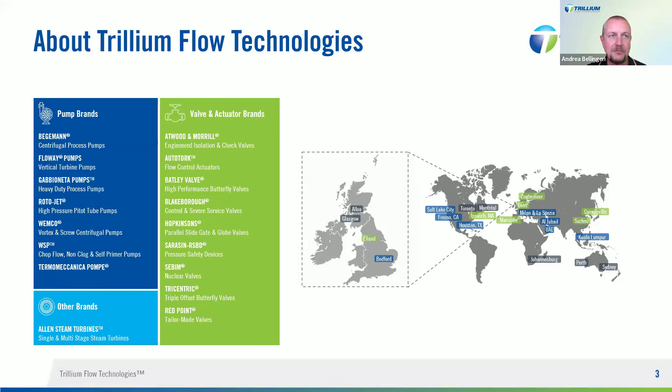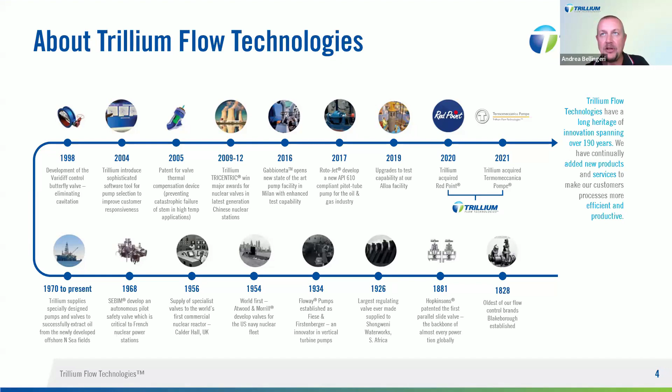Some interesting milestones in our history. We have a long heritage of innovation spanning 190 years. We started in 1828. We're continually adding new products and services to our portfolio. The last two additions were in 2020, Red Point, and in 2021, Termomeccanica Pompe from Italy.

A good idea for today is also the virtual trade show. If you are interested in having a look at our products, we welcome you to register at virtual.trilliumflow.com and enjoy the show. You can learn about our service offering and see what industries we are able to serve.

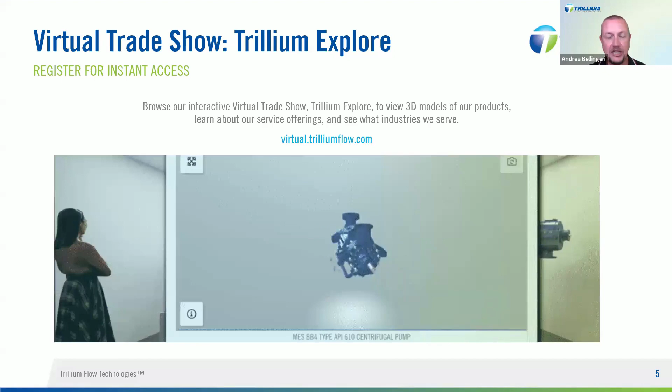Today we're going to talk about four important points, which we call market trends. You will hear about process efficiency and cost reduction in the supply chain. The point is how Trillium will be enabled to share cost savings with the client.

We also have reducing environmental impact and energy efficiency. By connecting our assets to the plant's control and data acquisition system, our clients can manage their entire process and gain efficiencies. Information from Trillium will support improvement in environmental governance while reducing the associated compliance cost.

That's our message. Regarding remote control and automation, this is called the Trillium Customer Digital Experience Innovation Area. Trillium can provide 24-hour-a-day monitoring and monthly reporting to increase on-site service capabilities. Decision-making driven by big data.

Trillium's cloud-based enterprise will enable our clients to have data readily available. Before Internet of Things, wireless monitoring, and 4.0 industrialization, which will be explained better by Sanket shortly, generally a product was used to be operated until failure. If the asset fails, both plant maintenance engineers and technical staff would be deployed into action to identify and solve the issue.

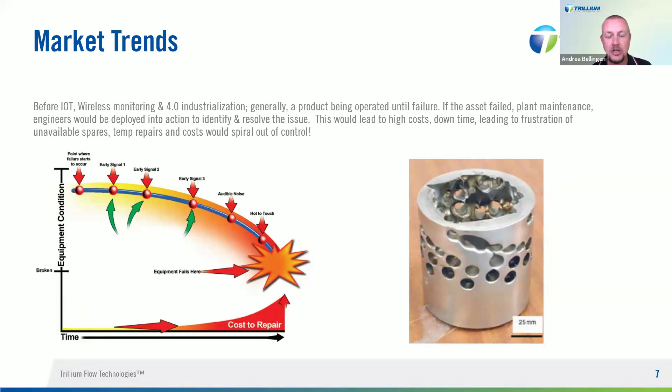This, of course, would lead to high cost, long downtime, and missing production. This is a huge impact, and we try to avoid this. We want to propose a solution to predict this and prevent it from happening in advance.

Customer pain points - what do we want to address here? What are the major pain points? One of them is certainly underperforming valves due to erosion. What causes this erosion? We are dealing with fluids, mainly hydrocarbons, with traces of sand.

Throttling these fluids, the local velocity increases, and this can lead quickly to rapid erosion of the valve trim. It's just a matter of time - it will happen. Most conventional control and choke valves are designed with labyrinth-style trims to achieve multi-stage pressure letdown, and this will also cause sand blockages. Now I'd like to pass the ball to Sanket, who will drive us to the core of our speech.

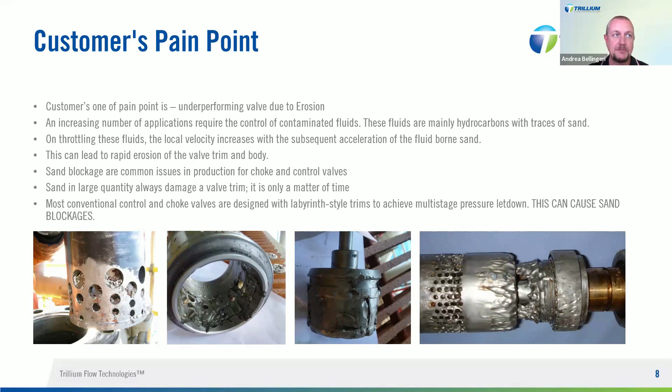So we have just seen how the valve has been used before IoT, or call it IIoT, and the result of it is expensive catastrophic damage.

But what is IIoT? What exactly is it, and how could it be beneficial to its end user? Basically, it's an abbreviation of Industrial Internet of Things, a vital element of Industrial Revolution 4.0, which is the current era of connectivity, advanced analytics, and automation.

The industrial machines have been producing valuable data for many years, which can be collected in a real-time environment and then processed through analytic software to track efficiencies, life cycle, and potential chances of failure of each machine. This technology can be used in process industry, as it can offer efficient maintenance processes, eliminate manual intervention, provide better safety to personnel working around the asset, and mainly it can help reduce production cost, which is what we are targeting.

We are addressing this in our solution. With this technology, sensors fitted around the control valve can continuously monitor its physical properties, and the monitored data can be compared with a pre-established baseline. If the valve starts operating below the pre-set threshold value, the system sends an alert to plant supervisors and engineers. Thus, a malfunctioning valve can be addressed well in advance, preventing costly delays and production losses.

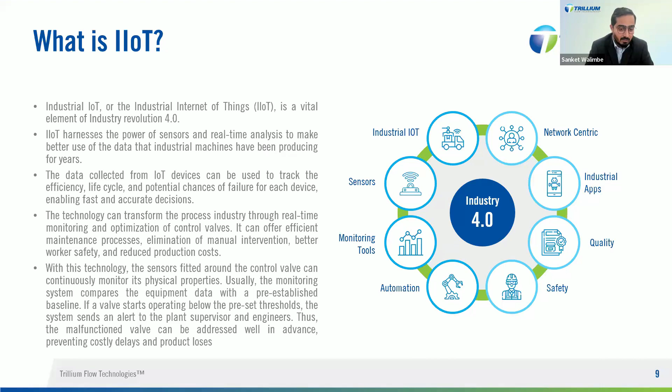So this is basically an overview of how we are looking at using this technology in our products - how we utilize IoT to address customer needs using our product expertise. Our fundamental commitment is to develop a sustainable solution. It took us years of strategy, planning, and thousands of hours to develop a solution that could address dynamic and unique customer needs.

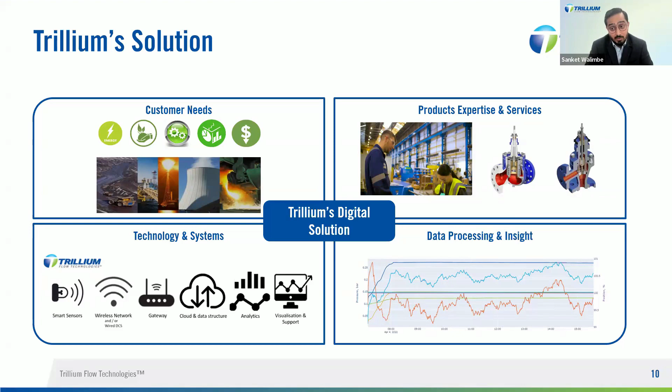Harnessing the power of cloud architecture along with data analytics tools, our system utilizes innovative smart technology to monitor performance degradation of mission critical valves. As you see in this slide, we equally considered every corner: the technology, the data analytics, our product expertise, and last but not least, the customer need.

I'm going to talk you through what exactly the solution is - just give you a bit of an overview. Trillium's new technology digitally transforms existing systems to give total care. It provides real-time condition monitoring, enabling plant preventive maintenance, minimizing downtime, and improving productivity of the plant, thereby increasing machine uptime and operational efficiency.

These are the clear benefits to customers using our technology. We aim to use big data - all these machines, equipment, valves, and things generate a lot of operational data. Our digital platform can handle large data sets 24/7 to better understand operation of a particular asset.

The customer will have full access to their asset operational data. Of course, they own the data, and they can deploy advanced analytics through our software to obtain accurate information about the condition of the assets.

We have also given a touch of predictive analysis in our solution. The data generated from the digital platform can be used to predict machine condition and anticipate any failure, so that operational efficiency can be maintained. If we can anticipate the failure of any particular valve, you can deploy forces accordingly.

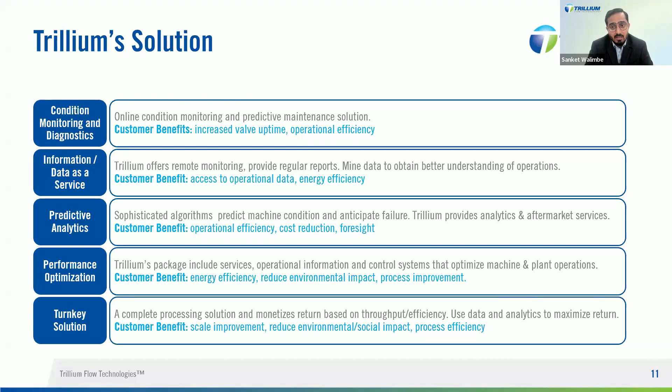So we have seen the overview of the solution. Let's take a look at how it's going to benefit the customer. I've taken an example of a 4-inch duplex control valve in a severe service application.

As you can see, I've taken an example of an oil and gas production system. But the severe service application can be found in any power station, refinery, or industrial plant where large mass flow rates at high differential pressures are needed.

In this example, the valve handles production and injection fluid, which are highly corrosive and erosive in nature. On the left side of the slide you can see the fluids listed. It could be a mixture of these, or a standalone fluid, but eventually it will erode away the valve in a matter of weeks or months, depending on service conditions.

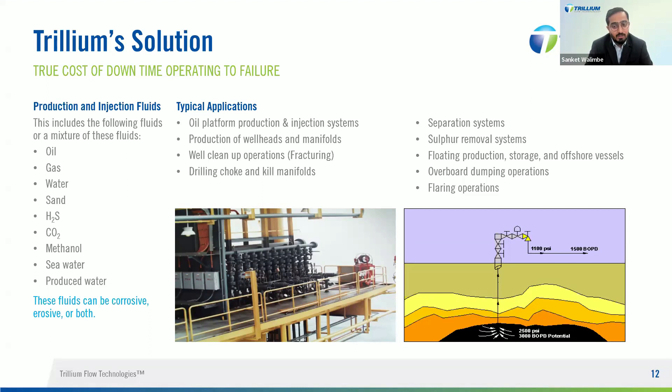We assume the valve is operated to failure, meaning without Trillium's condition monitoring system installed on it. Upon failure of the valve, you have to deploy emergency inspections, which would cost nearly $300.

I wanted to highlight this is the absolute minimum. If the valve is located offshore on an FPSO in the middle of the North Sea, this cost would definitely be in the thousands. It all depends on where the valve is located.

Then there would be an emergency labor cost, which is again $600. This will go into the thousands depending on where the valve is located.

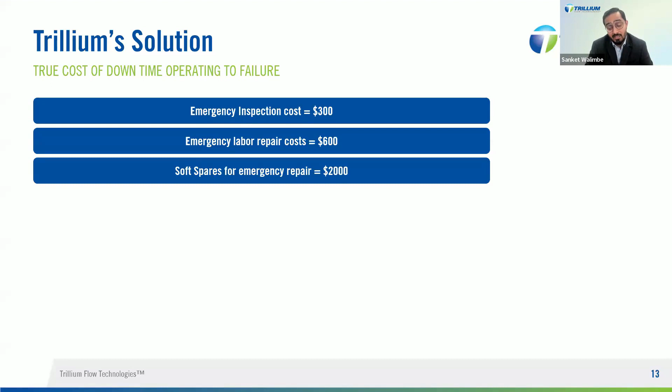Then you will need a soft spare in emergency spares, costing nearly $2,000. Along with that, you will need a new trim set - the plug, stem assembly, cage, disc stack, seats - costing around $6,000 with a 12-week lead time.

This is the critical point, because the supply chain could be long. If any of these components are made of exotic material, it's going to take a really long time to get that part back onto the valve, and it's going to cost a lot as well.

This is the minimum cost I'm showing you here. The additional soft spares you would need for future maintenance would cost nearly $2,000. And you would need to expedite everything to get it quicker, because you can't wait 12 to 14 weeks.

It would cost you $3,000 to expedite, again depending on how the supply chain is set up for that particular component.

Finally, when you have all these components, you need to fit them back into the valve. That again costs $600, depending on where the valve is located.

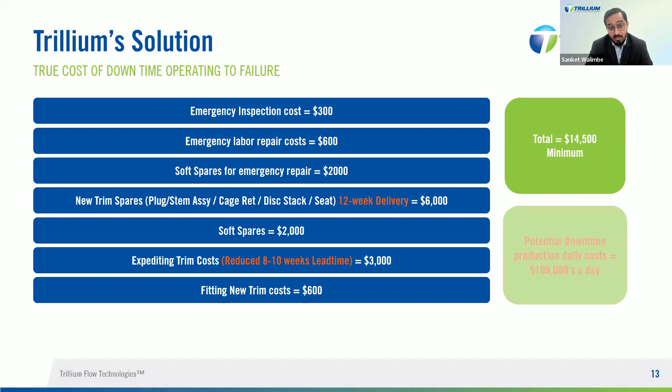So everything put together - the emergency cost, the inspection cost, the labor cost - would be nearly $14,500. This looks like a very small amount when you think about an oil and gas production system. But the major cost attached to it is the production downtime cost, which could be hundreds of thousands of dollars per day.

If this valve had been equipped with the Trillium Smart Valve technology, we reckon the potential saving on the emergency cost would be 45%. And the downtime cost could go down between $50K to $100,000 a day. So this is the cost we're targeting - how we could minimize this downtime cost using our technology.

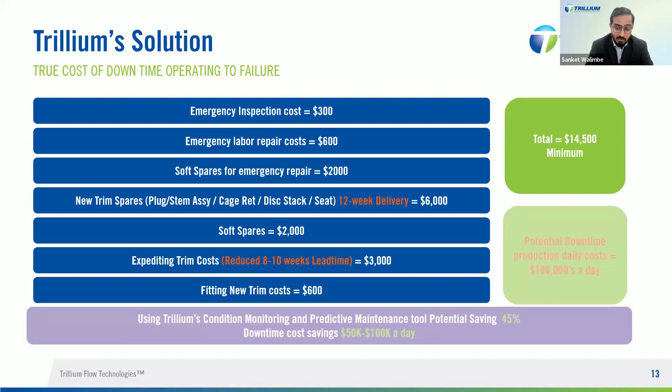So we talked about the market trends, we talked about customers' pain points, we had an overview of our solution. We also touched on the example of the potential savings this solution can bring to the customer if this system is in place.

Now let's take a brief look at the architecture of the dashboard - basically the software - and look at where you can see all the critical information on one screen.

When the system is up and running on any asset, the first thing you have to do is select the asset and where it is. You have drop-down boxes where you can select the site, select the asset tag number, and click the submit button, and it will populate the necessary data.

You also have the option to use the interactive map - you can zoom in and zoom out to select the asset if you know its exact location. There's also a table that gives you an overview of the assets and tag numbers, so you have an option to select that way as well.

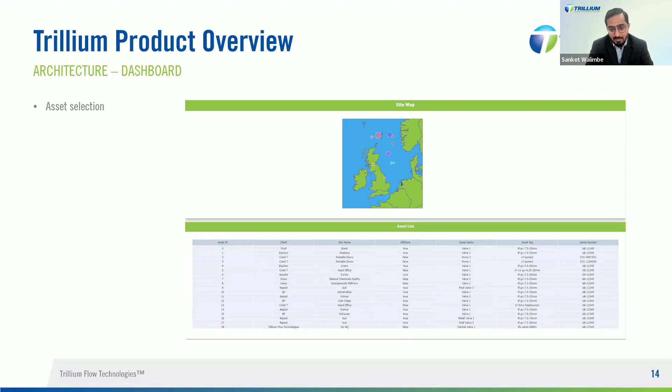When you submit this information about the asset, the dashboard appears, displaying the flow parameters - as you can see here, the upstream and downstream pressures, and the valve position from the digital positioner.

You will have a flow meter reading, which is basically the flow rate going through the valve. You have a fluid temperature, and the fluid type, which depends on SG, the specific gravity of the fluid. You also have the health of a battery and a signal strength of the connected equipment, which is quite an important parameter to keep an eye on.

So all these readings are taken live, and the refresh rate can be selected according to the criticality of the asset. You basically set the refresh rate you need, whether in a few seconds or in 5 minutes, which affects the battery consumption needed for each instrument. So you can select that refresh rate according to the need of the process.

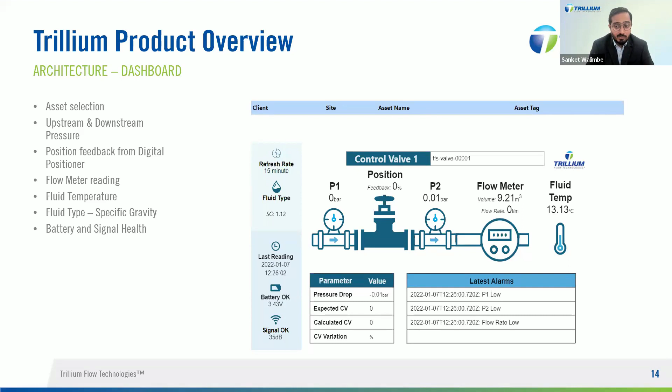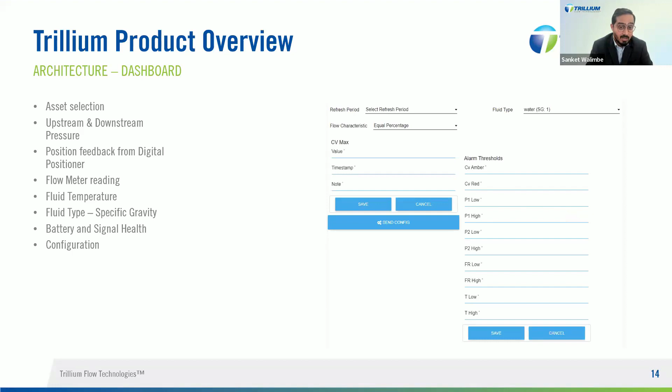So we have seen the dashboard now, the different features, the different buttons, and how you can select the assets and everything. Now let's take a look at data storage, connectivity, and asset access.

The first and probably the most important instrument is a digital positioner or smart positioner. Our platform is flexible to accommodate input from industry-leading positioners. Our system can take inputs from various interfaces such as HART, smart positioner, field bus, etc. Any interface you have on site, our system can be tweaked to take those inputs. So the system is flexible, and the customer doesn't need to consider changing their existing positioner or any other instrument.

When it comes to installing additional sensors, data loggers, transmitters, or gateway systems, we partner with industry-leading suppliers to get instruments suitable for hazardous zones, pressures, or temperatures. You have different temperature limits for particular fluids, so we can bring those suitable instruments into the package and have that supplied. So there's flexibility there as well.

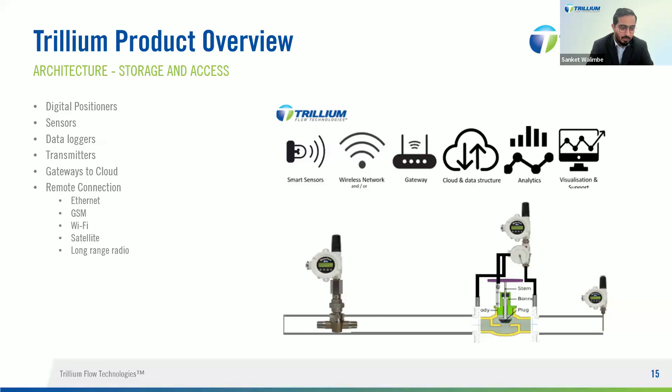The important thing is remote connectivity. During our development stage, we focused on this attribute, so we developed the system to be connected using a variety of networks such as Ethernet, GSM, Wi-Fi, long-range radio, or even satellite. So if the asset is in a confined space or somewhere remote where network selection is limited, we can work with the available network and get the instruments connected and get the data into the software and analyzed. That flexibility is there as well.

The most critical part, or probably the next critical part, is data storage. We understand the data is very, very precious. It's very classified with some customers, and it cannot be shared with third parties.

So we have given an option to save this data. The customer can deploy a cloud-based server, or have Trillium servers, either on cloud or on premises, or the customer can use their own server. Flexibility is definitely given there, as we understand data is very critical. In any of these cases, we ensure that the data and the network is secured and protected at all times, because that is something everyone is looking for in this digital scenario—how the data is protected and secured.

Then the alerts are probably the key, without which the system is incomplete. If you don't get the alert about your thresholds, then you're basically not getting the information about your asset. So once the data is analyzed by our algorithm, the customer can get alerts via emails, on the dashboard, or text messages on the designated device, so that the necessary action can be taken in a timely manner.

As I shown you previously, you can select your thresholds, and then you will get the alarm when the process crosses the threshold, and you can get the alarms on your selected device.

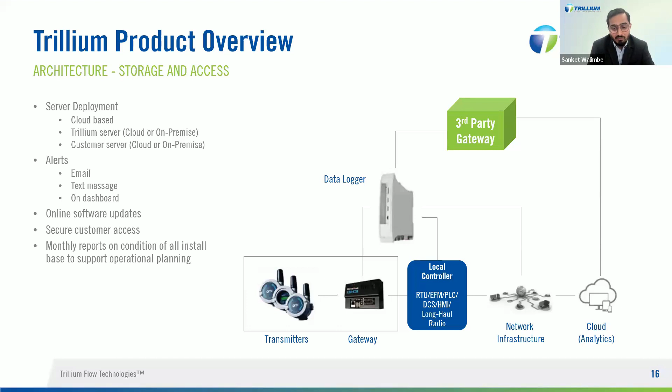So we have seen the dashboard, the storage, connectivity, mostly related to the cloud and the software. Now let me take a step back and give you an overview of the approach we took to develop this condition monitoring algorithm.

Andrea has talked about one of the issues in a severe service valve, which is erosion. We understand this issue is inevitable—it can be minimized, it can be detected early, but it cannot be avoided entirely. So we addressed this issue and came up with an approach to develop the algorithm around it. Let's take a quick look at the approach.

We started with extensive lab testing. To identify the wear rate of different materials, we supply this trim in different materials, and all these materials have a different rate of erosion. They erode away—some materials are softer and erode quickly, some are harder and take longer. It also depends on the service condition, not just the material. So we needed to understand how exactly this material erodes in different conditions.

We developed a small erosion test bench to understand how these different materials react to different erosion conditions. As you probably know, the erosion rate is a function of concentration of contaminants, size of contaminants, specific gravity of the fluid, and velocity of the fluid. We came up with a number of permutations and combinations of these factors to develop the erosion rate.

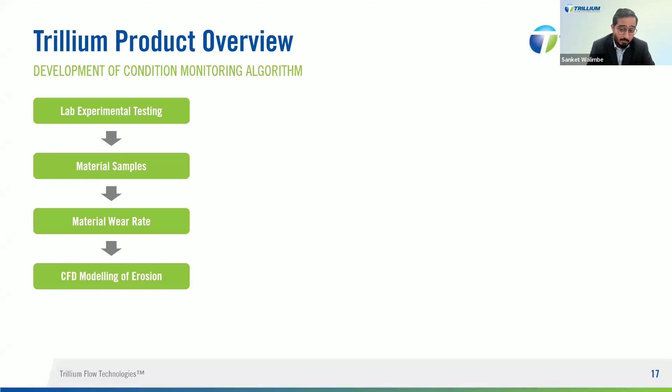Once we know the erosion rate of that particular material, we deploy that erosion rate using computational fluid dynamics to the individual trim. This helps us come up with a baseline for the algorithm. This is kind of a theoretical exercise that we did.

To verify the outcome of this CFD or theoretical data, we developed a full flow loop for conducting erosion tests on an actual valve. We created an erosion media with different sizes and concentrations of contaminants, ran it through the loop at different velocities, which generated the erosion trend of that particular trim. We then compared the final results with the CFD to understand how close the empirical test results are to the CFD.

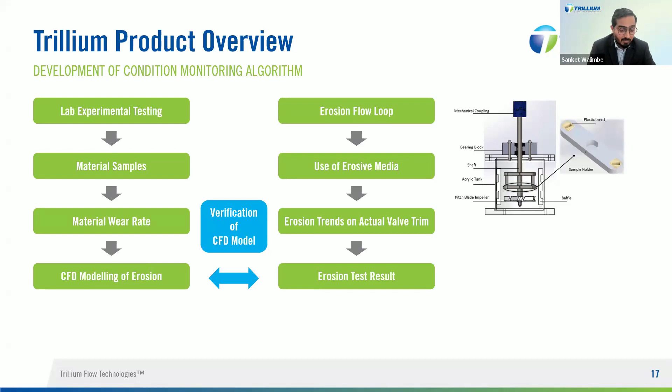It's a small flow loop, so we didn't bother about going for wireless, but we can definitely offer wireless sensors here. And this is basically the flow loop. So we basically conducted multiple flow tests on the trim, evaluated the erosion trends from each of the trim, and as I said, I compared with the CFD results, and we further refined our algorithm.

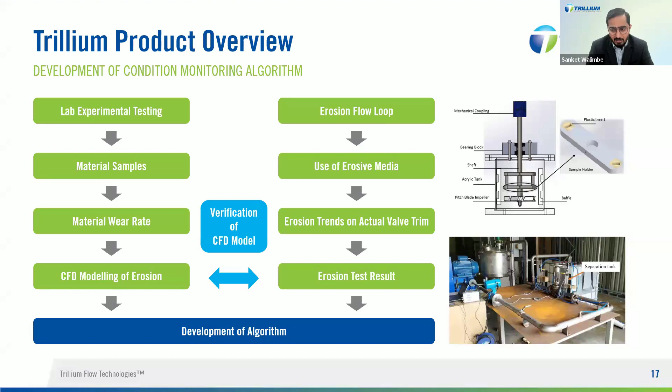That basically can be used going forward in any of the field like scenarios. So let's see a little further on the CFD studies. We did understand the effect of erosion at a micro level.

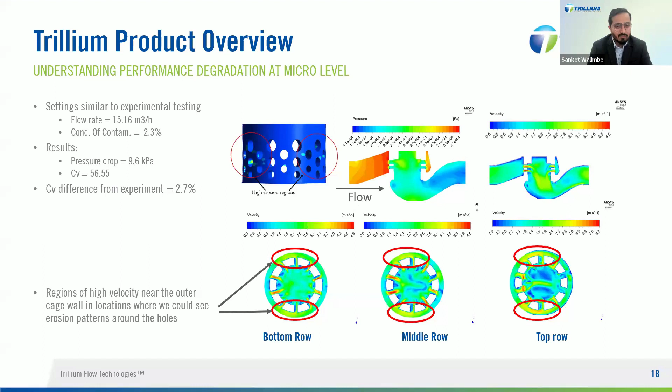So let's take a look at how we use this understanding from this micro level study to understand the bigger problem. We came up with a global erosion rate. We basically understand the erosion rate at local areas, and from the local areas we basically come up with a global erosion rate. And what we did is we extrapolated that result to understand the valve, to understand the effect of change of the CV on the valve position, according to the valve position, and on the specific time frame as well.

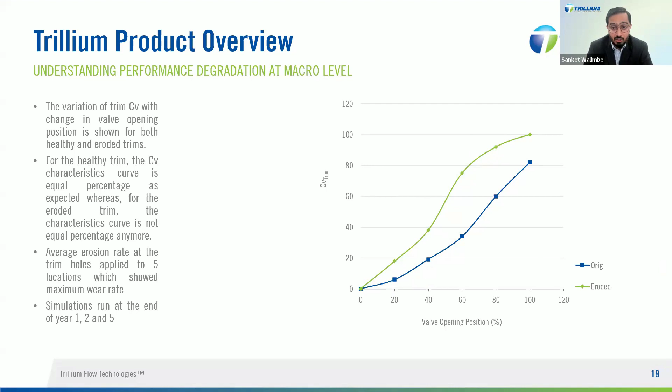So if you see on this graph, you have two CV graphs. You have equal percentage, which is the original graph of the trim, and you have one which is the eroded trim. That's basically something coming out of when you apply the global erosion rate to the particular trim - it shows the change in the CV according to the position. And then there is the average global erosion rate we apply to the trim to identify a CV change over the number of years.

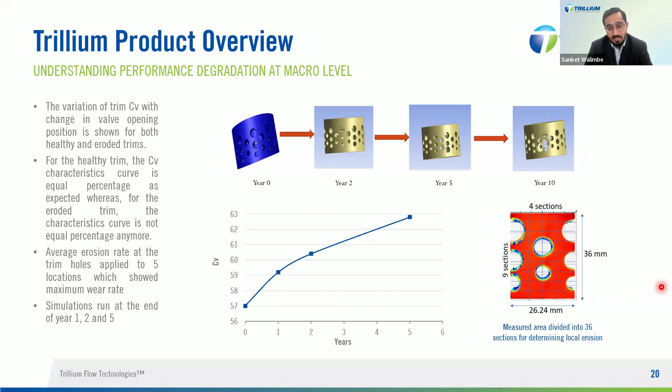So as you see, there is a number of years considered, like in this example, 5 to 6, 7 years, 10 years timeline, but there is no trim that can last around this long time. This is just an example I wanted to show for this presentation. But as you can see here on this image, the area of the flow path has changed over time, and that basically reflects on the CV. So that's basically the performance degradation at the macro level.

Then we conducted empirical tests to validate this theory. We conducted multiple accelerated erosion tests. We started with a soft material trim, which we redesigned to suit the process condition of the loop. So we considered a bronze - we just wanted to prove the theory, so we considered the soft trim here.

The design CV of the trim was nearly 12.67, and the predicted change after the test was 18.97. This is coming from the theory, and then we set similar conditions on the flow loop and found the actual change in CV was 18.15, which is pretty close to what we predicted, within plus and minus 5% of the theoretical results, so that's what we expected.

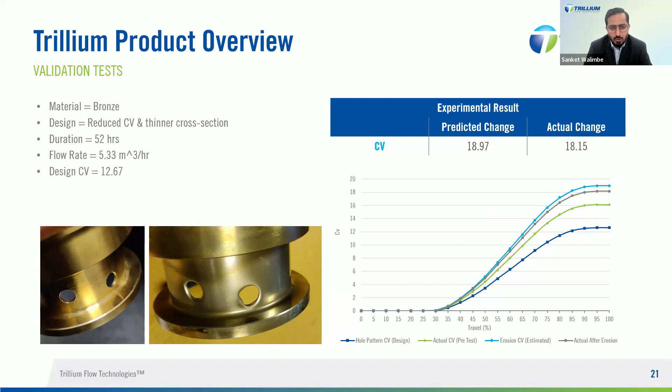It's pretty accurate. If you notice on this graph, the solid light blue line shows the theoretical CV, and the gray line shows the actual CV found after the test. So it's pretty close.

That's all the information, all the results we've seen during our development stage and testing. But how exactly the customer will see these results, how they're represented to the customer, is the critical part of it.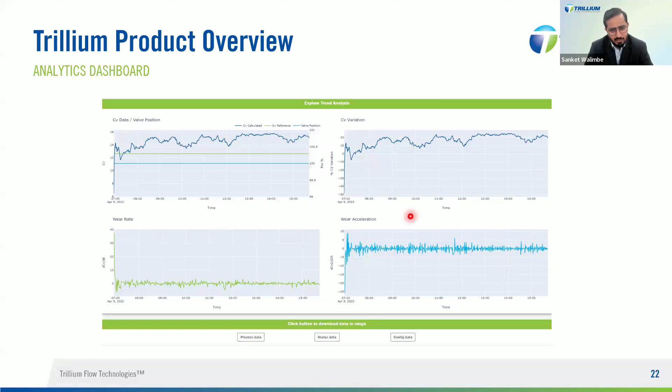Again, I can emphasize on this plateau - in this example, you can see there is less acceleration compared to the rest of the test. Lastly, you have an alarm window which provides information about the different thresholds you have set.

You have a P1, P2 alarm, your CV alarms, you have flow rate, and you can select the temperature as well if you want. All of this can be set, and all of this can be notified on the dashboard.

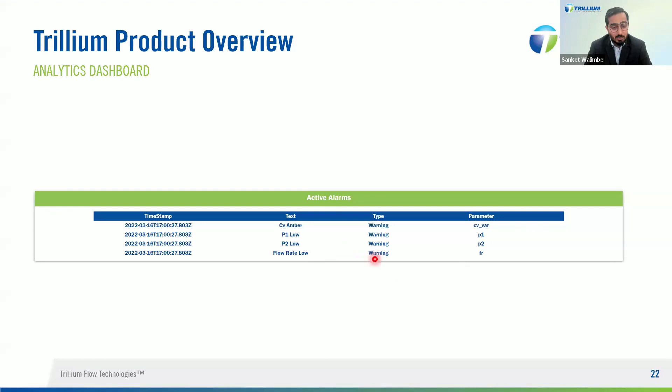You can see all this information on one screen, or you can set it on multiple screens. It's basically as long as you can have your decision informed in the right and timely manner - we can set up all these things according to the need.

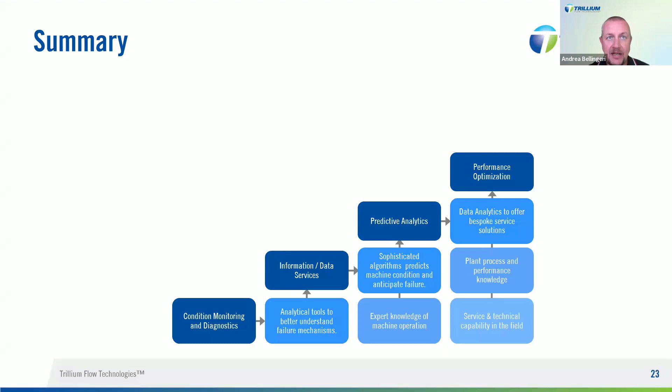Condition monitoring and diagnostics will provide information and data service, which will lead to predictive analytics due to our algorithms and anticipate failures. This is a performance optimization of valve, line, system, and plant, due to mitigation of risk and money savings. So we're proud to say this is our turnkey solution and leverage capabilities to move up the value chain.

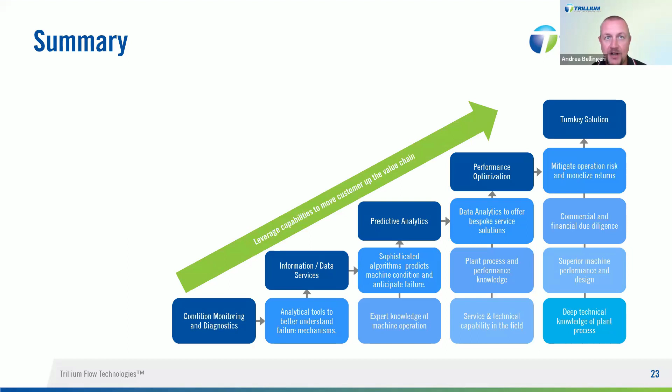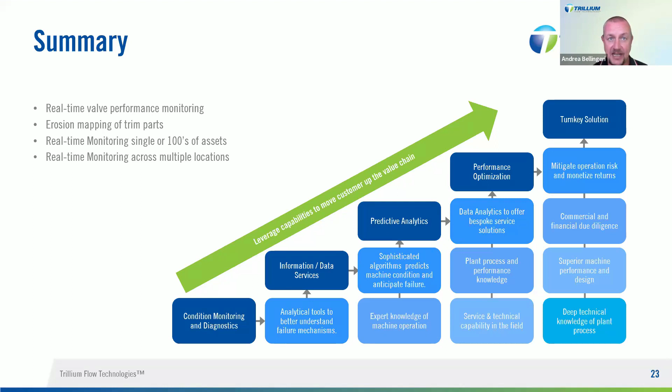In a nutshell: real-time valve performance monitoring, erosion mapping of trim parts, real-time monitoring of single or hundreds of assets in multiple locations, all 24 hours a day and 365 days a year with one software for all valves. So this is how we help improve sustainability. And thanks everyone for listening to us today.